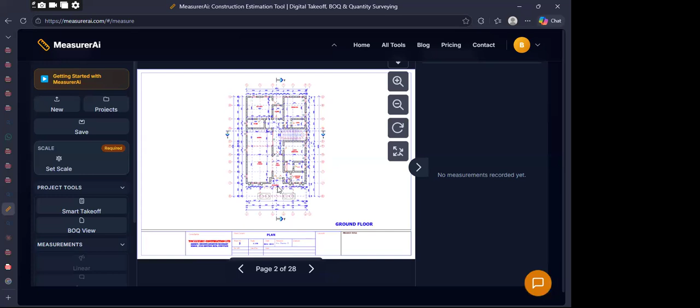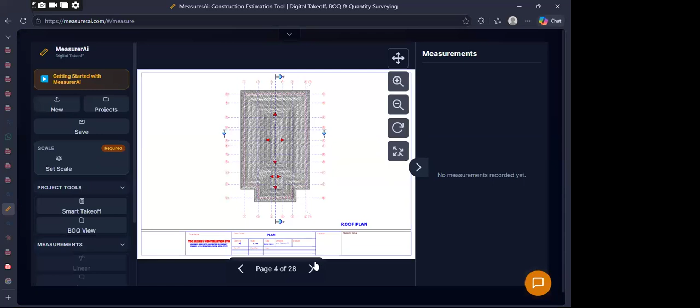Okay, so we have uploaded these drawings into Measure AI, and this is Measure AI smart takeoff. Sometimes when uploading drawings it takes time, but you can keep on refreshing it here, load it here to open it. So this is a drawing that we are going to work on in this training.

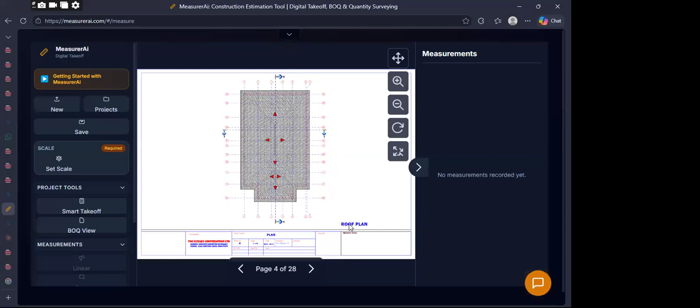Okay, so with this drawing, we are going to learn how to take off, prepare the BOQ and material and labour schedule using Measure AI. To get started, this is the ground floor, this is the first floor, this is the roof plan, and this is the section. So this is all about this drawing. We start from this ground floor plan.

Sometimes we receive drawings with the structural drawing, sometimes we receive only the architectural drawings. Now we have only the architectural drawing, and we are going to use it to also take off for the foundation works too. Before you can do an estimate, first you must learn how to read your drawing. It's very important.

You know that this is your wall, this is your window, these are your doors and everything. So you must learn how to read drawings first. That is the first thing you need to know how to do. In this training, we are not going to teach how to read drawings. So first, we've imported our plan here. I went to this New, clicked on it, and imported my plan.

Okay, so the next thing to do is to scale the drawing. How can I scale it? I will need to choose any of the dimensions. You can see this is our width here. I will choose any of the dimensions, maybe the width and the length here. So I will choose this 12.07 here.

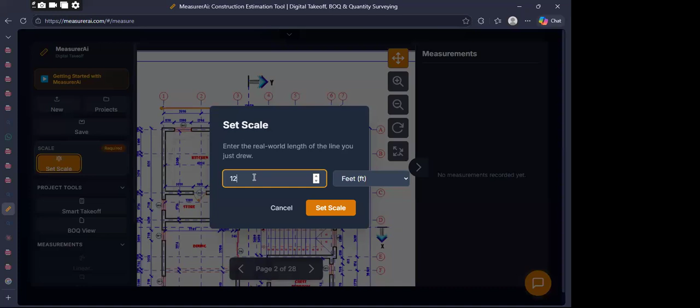Okay, so I will now go to this Set Scale and click on it. I'll come here, click here, click here. So I will click the dimension, 12.07 meters, Set Scale. So I've set my scale.

The next thing I'm going to do now is to start the takeoff. Before I start the takeoff, I need to go to the smart takeoff here. You can see where I went to, the smart takeoff. This is Measure AI smart takeoff. This is where you can upload your drawing, this is where you scale your drawing, and these are colors that you can choose from.

And this is the smart takeoff. This is where we take off and generate our BOQ. This is our BOQ, where we see what we are doing in the BOQ. And these are the measurement tools: the linear tools, the area tools, the counts.

This one shows that if you want to calculate anything linear, you use the linear tool. Any length things, you use the linear tool. The area, you want to get the area of this kitchen, use the area tool. You want to know how many windows are in this plan, you use the counts.

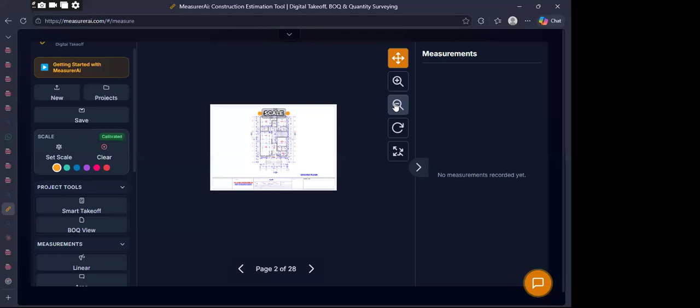So this is rotate. If my drawing is upside down and I want to correct it, I'll use this rotate button here. And this is reset view. If my drawing is like this and I want the view to be reset, I'll just click on reset view and it will be okay again. Okay, so this is about Measure AI smart takeoff.

And maybe you are not seeing very well here. You can just click here, up here. Then you can now see everything. So now let us go to the smart takeoff here. So this is the smart takeoff. If you are using your mobile phone, you need to turn on desktop mode. And on your mobile phone, you cannot use digital takeoff. You can only use the smart takeoff, and this is where you upload your plan.

Okay, so you upload your plan. From this plan, you use the smart calculators here to take off. Okay, so if you look at this, this is the smart takeoff, and here is where you can click to go to our YouTube to learn more about this smart takeoff. It means understand smart takeoff.

Okay, so you can see the substructure here, and you see the substructure smart calculator. You see the site clearance, the strip foundation, the pad foundation, the column starter, the raft foundation, the pile foundation, ground beam, foundation blockwork, and the ground floor slab.

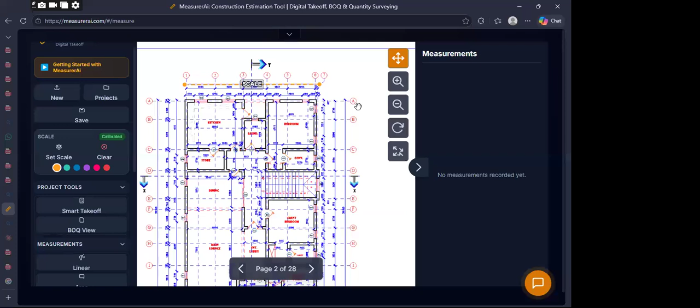We go to this, you can see the width is 12.07, okay, and the length is 20.57. So we go back here and input 20.57 and the width is 12.07. So we're not going to put anything here.

Okay, so the topsoil depth, your own can be different. So I'm using 150, which is 0.15 meters. Okay, so you can see the results here. The total area is this, and the topsoil volume is this. Okay, so the next thing to do, I'm using my mouse to control it.

Okay, so I will click here. I will go up. So I'll click on strip foundation, and I will go down. So this is strip foundation, and we need to fill in all these spaces here. The total length. This is the total trench excavation length, trench excavation in our foundation. Okay, so this is the trench width. This is the trench depth.

This is the concrete thickness. This is the blinding thickness, and this is the blockwork thickness. Okay, so this is for our foundation work. All these trench width, trench depth, concrete thickness, blinding thickness, blockwork thickness, and the bulking factor, you can all see in your structural drawings. But the trench length is what we need to measure.

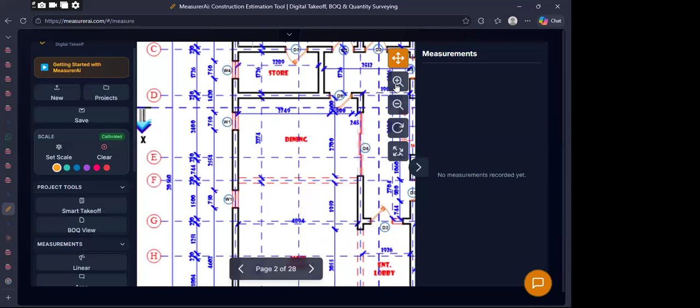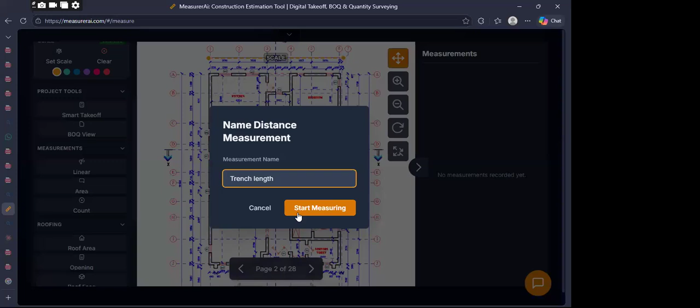Okay, so now we go to the digital takeoff and we measure it. This is not our foundation layout, but we are going to use it to measure the trench length. So how do we start? Since we have scaled our drawing here, we go to the linear, click on the linear and type trench length. I'll click start measuring, and measure all this. You can see I left click twice and I drop this. Okay, so this is what I have.

Trench length, that's 2.09. I have not finished all this, so I have to continue measuring all these to get the total length needed. So I will click here, left click once to continue the measurements. Once and click here. Once, click here. Once, okay.

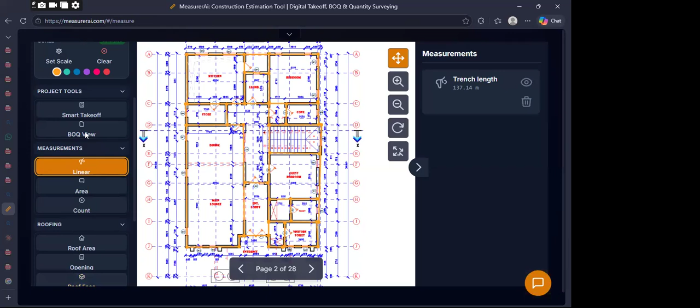So we go down to the reinforcement. Are you using BRC mesh or are you using rebar reinforcement? If you are using rebar, you click on rebar and see your top layer. Are you using 10 mm or 12 mm? Choose the spacing here. Do you have any extra length like a return? If you have it, you can include it here.

And this is the bottom layer: the reinforcement and the spacing we are using. Do you have any return? If you have, you include it here. Once you see all this, you now see the next area: sand filling volume, damp-proof membrane, the hardcore volume, the slab concrete, and the reinforcements.